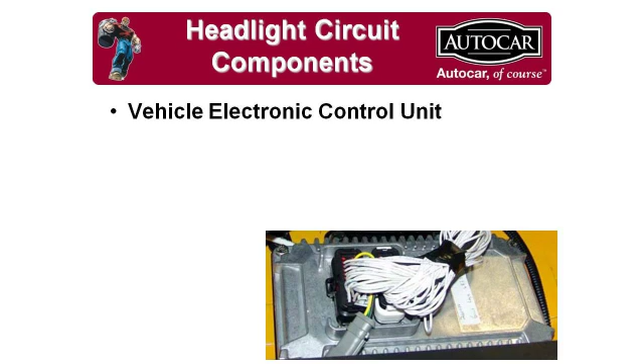So to start out with, we'll run through the components that we're going to cover. The vehicle electronic control unit. The control unit also communicates with the multiplexed vehicle electrical center. However, the MVEC is not a part of the headlamp system in this case. Fuse box 1 and fuse box 2. Of course, the headlight switch, the high beam switch, and finally the headlight relay.

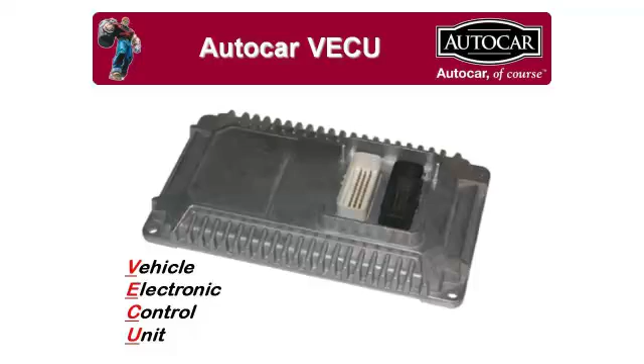To start out with, we'll talk about the vehicle electronic control unit, or the VECU. We also call that the VCU and the VCM in different publications and schematics. The VECU is mounted under the primary side driver's armrest. So remove the thumb screws, remove the armrest cover to access the VECU.

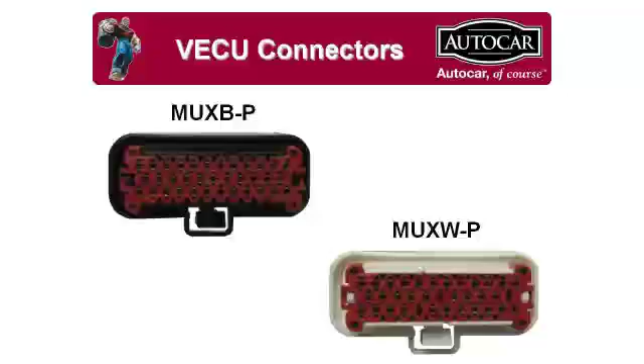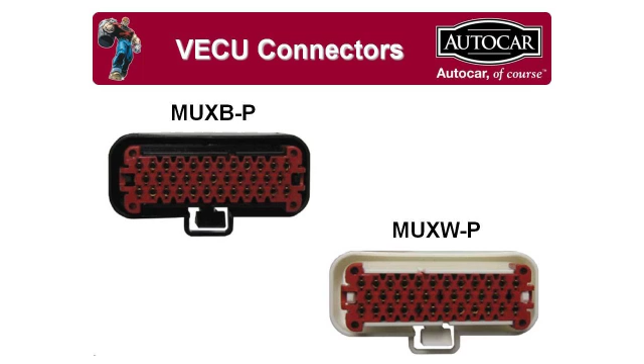The VECU is connected to the vehicle through two harness connectors, a black connector and a white connector. The black connector is labeled MUXB and the white connector MUXW. The P, which either precedes or follows the harness connector identification, indicates that that is a plug rather than a receptacle. When we wire our circuits and identify those in the schematics, we'll refer to those as circuit pin B12 or B6 or W9. So make sure when you're checking out one of those circuits, you're in the correct colored connector.

Fuse box 1 and fuse box 2 both have components for the headlamp system, and they're mounted under the dash on the primary driver's side of the vehicle. The circuit maps for fuse box 1 and 2 can be located underneath the armrest cover on the primary side of the vehicle. Refer to those circuit maps for all component locations. The headlamp switch is mounted in the forward control panel up next to the windshield.

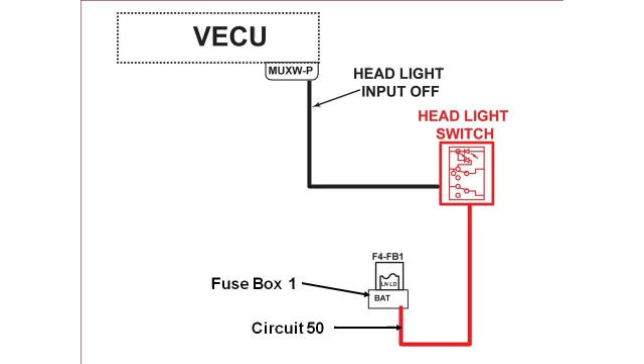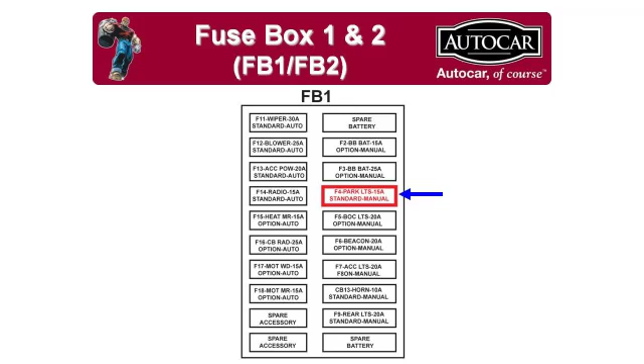Now let's talk about headlamp circuit operation. The headlamps are operated anytime the headlamp switch is in the on position. The headlamp switch gets its power off of fuse number 4, which is located in fuse box number 1, and when turned on, supplies an input to the VECU on pin W27. The circuit breaker, located in fuse box number 1, is the fourth slot down on the right hand side, and is identified as F4. This is a manual reset circuit breaker that must be physically reset should it trip.

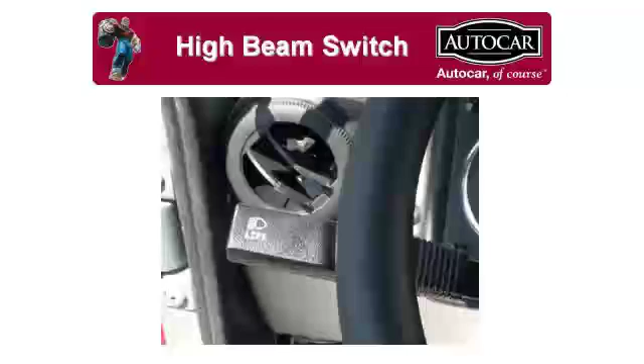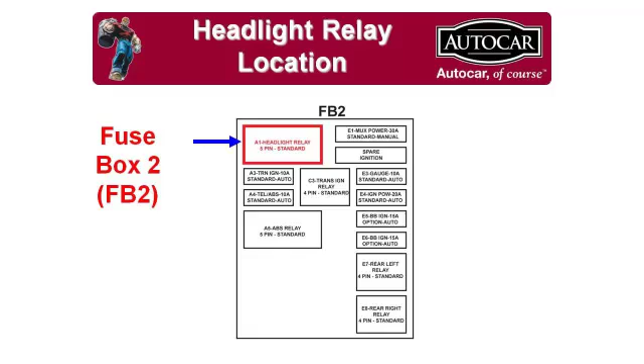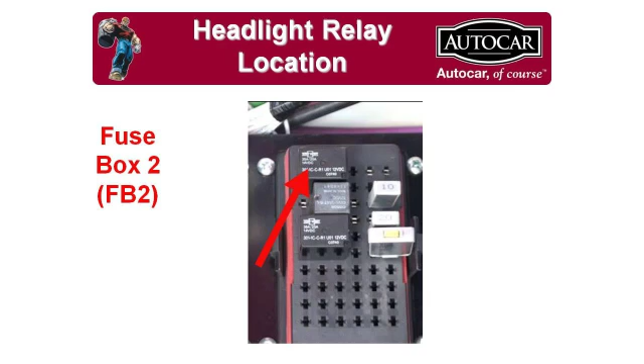The high beam switch is located on the turn signal switch lever. It is a toggling switch. Lift it once to go to high beam, lift it again to go back to low beam. The high beam switch controls the headlamp relay, which is located in fuse box number 2. The headlight relay is a 5-pin relay. Make sure to install it in the correct orientation in the fuse box. If you accidentally turn it upside down, pin 87A will not contact the correct pin.

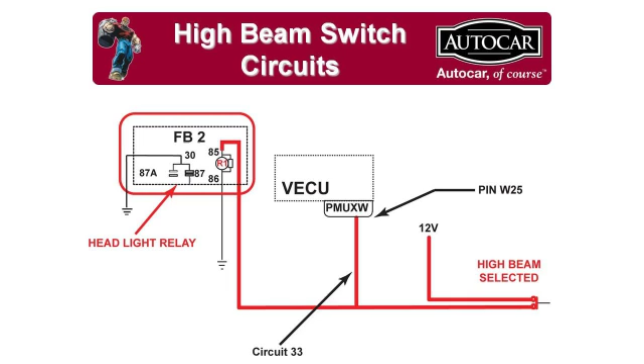The high beam switch gets its power from the accessory circuit in the cab. When it's de-energized, the VECU responds, turning off the high beam indicator lamp, and the relay in fuse box 2 for the headlights remains de-energized. Activating the high beam switch sends a signal to the VECU, which responds by illuminating the high beam indicator lamp, and we also send that 12-volt signal to the headlamp relay, which activates and changes the ground over to the high beam side of the headlamp circuits.

To check the operation of the headlamp high beam switch, disconnect the white connector, put a suitable probe on pin 25, and check the voltage as you toggle between high beam and low beam.

Now let's turn our attention to the VECU primary headlight outputs. There are 8 outputs total for the 2 headlamps, 4 for the primary and 4 for the secondary. The 4 primary outputs are in pin 24, 25, 26, and 27 of the white connector. Once leaving the connector, those splice together and become circuit 30P and deliver 12 volts or 6 volts, depending on the operation of the headlamps, to the primary side lamp.

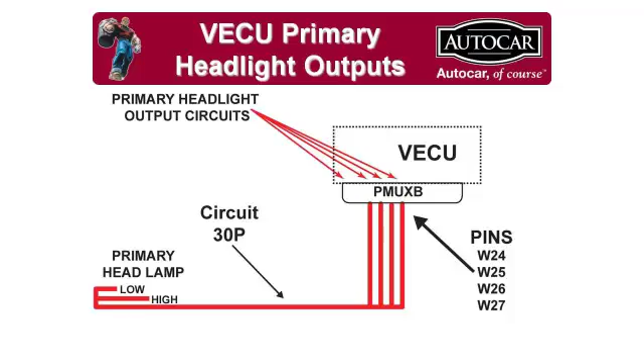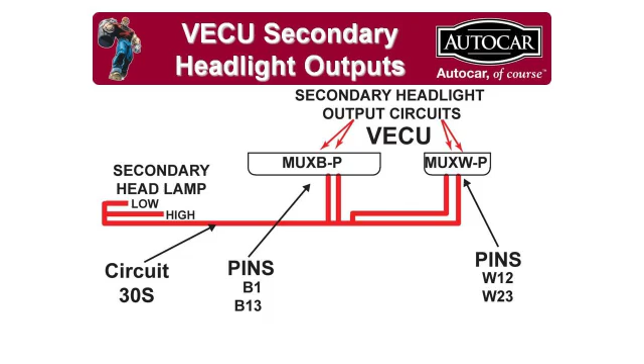The secondary circuit utilizes 2 pins in the black connector, pin 1 and pin 13, and 2 pins in the white connector, pin 12 and pin 23. Again, those splice together and this time deliver power to the secondary headlamp over circuit 30S. In the operation of the headlamps, when the low beam is selected, so the headlamps are turned on, the input goes to the VECU for headlamps on, and the VECU responds by powering up all 8 outputs. Those are 12 volt outputs.

They're fed to each of the headlamps, and the headlamps are then grounded through the normally closed contact of fuse box number 2's headlight relay. When we activate the high beams, we not only send that signal to VECU to command the headlamp high beam indicator lamp on, we power up the relay in fuse box number 2, and that headlamp relay then switches the ground from pin 87A over to pin 87, grounding the high beams, effectively operating the high beams and shutting down

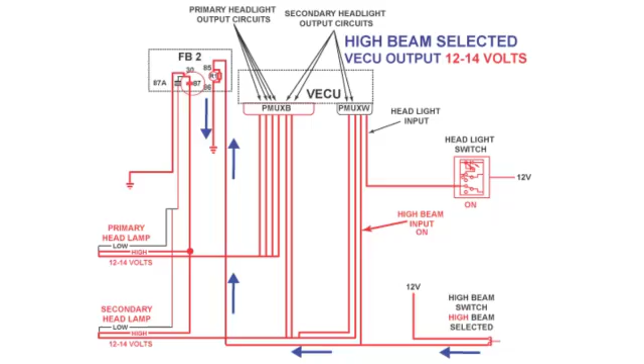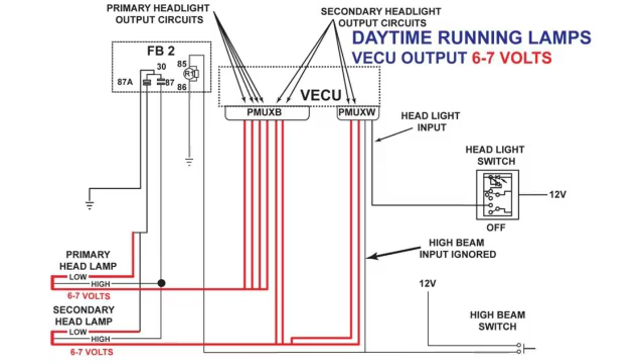the low beams. For daytime running lamp operations, when trucks are equipped with this option, the VECU changes its output from 12 volts on those 8 circuits down to 50% of battery voltage, so you read somewhere between 6 to 7 volts with the engine running. Keep in mind that the dimmer switch or high beam switch input is ignored by the VECU, therefore the high beam lamp never illuminates on the instrument cluster. The relay is still powered up and may switch between high and low during daytime running lamp operation.

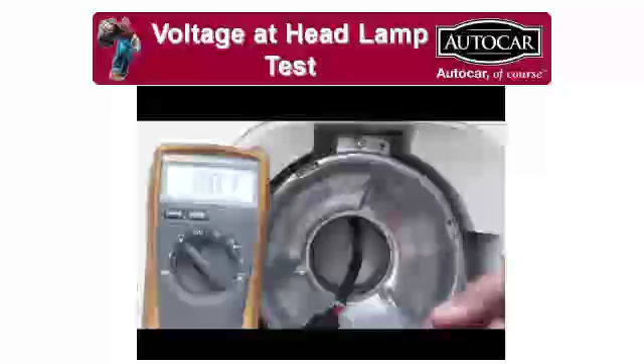To check the voltage at the headlamp, it's always a good idea to remove the headlamp, either check the voltage or replace it with a known good lamp before proceeding. But then check the voltage on each of the circuits, looking at both high beam and low beam voltage or DRL voltage, whatever the case might be. If voltage is present, then we need to verify that ground, remembering that that ground runs back through the headlamp relay in fuse box number 2.